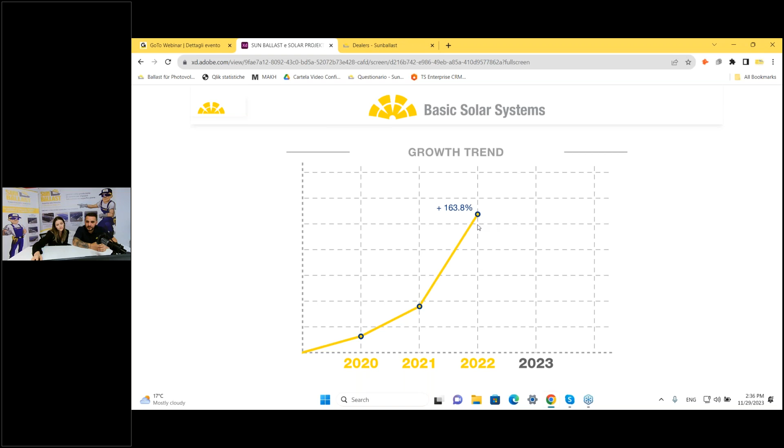Perfect. So in all these years we have this growth plan that I'm going to show you here, to show you that we are a reliable company. Correct, so in these four years we have been reaching great numbers - last year plus more than 56%.

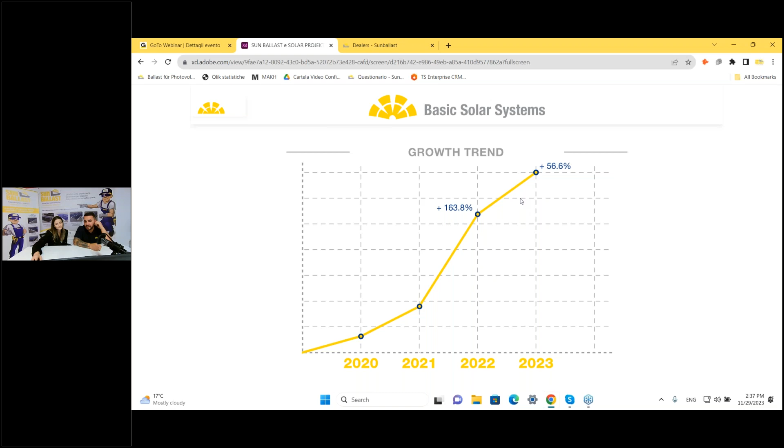Correct. We know that 2022 there was a year with a lot of incentives from the government, so that was the peak of Sun Ballast from 2021 to 2022. There were huge demands from all installers out there. And we see then in 2023 that it's a bit harder, no incentives in the market. We are still doing well, still coming with new solutions, and we see that the trend keeps going up - a lot of people out there are demanding concrete structures on their flat roofs. So now we can say that we are present in all Europe.

With more than 40 distributors all around Europe, we have a new branch in the United States lately, where we have our distribution point and production site as well, and we are selling almost all over the world. It's been a trend because we started the distribution part four years ago, and now we can say more than 40 countries have Sun Ballast material on stock, and one of them is with us today.

Boris, as I explained before, in his company they always have material available. Perfect. So saying this, we can say some of the biggest advantages of the structure of all our systems.

Then we can see each solution one by one and see what kind of problems they face. As you know, ballast comes with different systems. We do not have only one type of ballast. All the ballasts come with different inclinations from 0 to 35 degrees. Our engineers on the team created different systems for all the problems that installers were facing. So starting from single row systems, the connect system, sail, east-west, all these systems we developed on a concrete structure, and it would be easy for you guys to use.

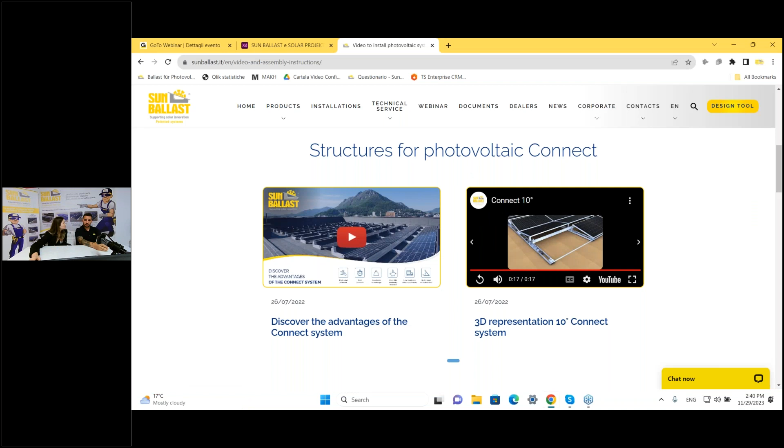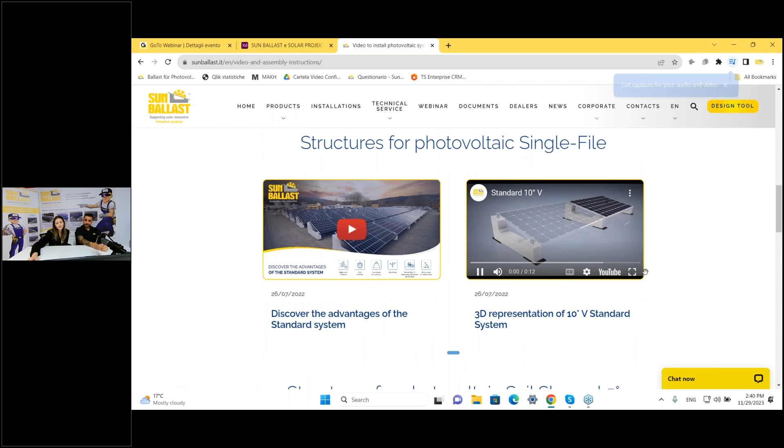The same idea goes for all the systems that we have out there. Another video to show you: same installation, so the sheet, ballast, just position, the module, and clamps that we always provide. Of course, according to different areas and locations, our engineering and technical team can always tell you if it's necessary to use additional accessories, which we also have, and we provide it to you with our technical report. But basically it has just a few components, and it makes the installation way easier.

So now we will see all our solutions. I don't know, Boris, is there anything you'd like to add at this point?

I would just add that mostly in Croatia so far we noticed that using east-west solutions with standard 10 degrees and 60 kilo ballast is something mostly used so far, because a bigger roof area always wants to be much more covered with solar panels, so east-west orientation is mostly used in those cases. Also, the wind is less dangerous for those solutions, so standard 10 degrees 60 kilo is something we mostly use here at the moment, as well as connect system 10 degrees, sail system 5 degrees, and sail system 11 degrees.

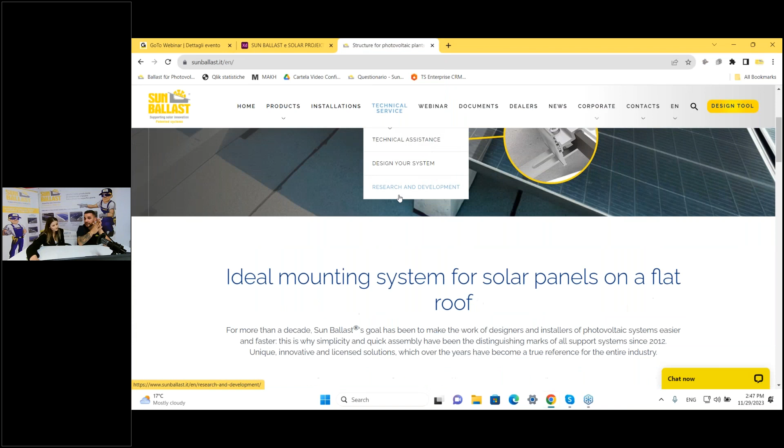There are countries, I can say Malta for example, that don't mind using a very small distance of 30 centimeters from panel to panel. It does not create shade. So we suggest 60 to 80 centimeters, but you could change it according to your engineer, according to the area where you're located.

If you want to check what our technicians suggest for each ballast, you have a technical data sheet. You just go to the technical data sheet and you see, for example, here the distance should be at least 60 centimeters to not create shadow between panels, so they will produce more. Of course, there are two ways of laying it.

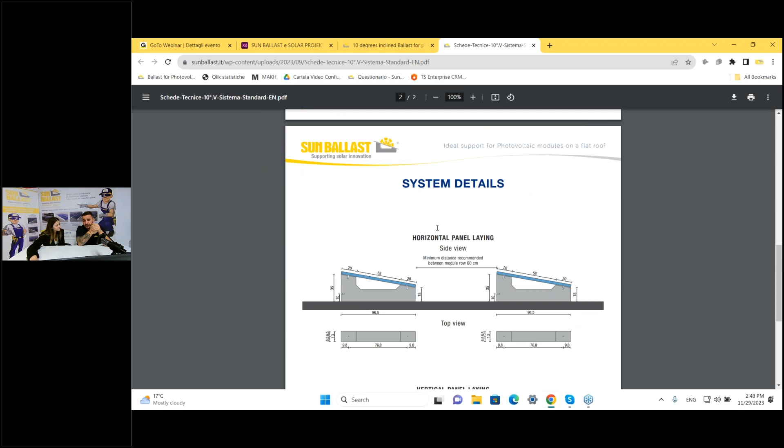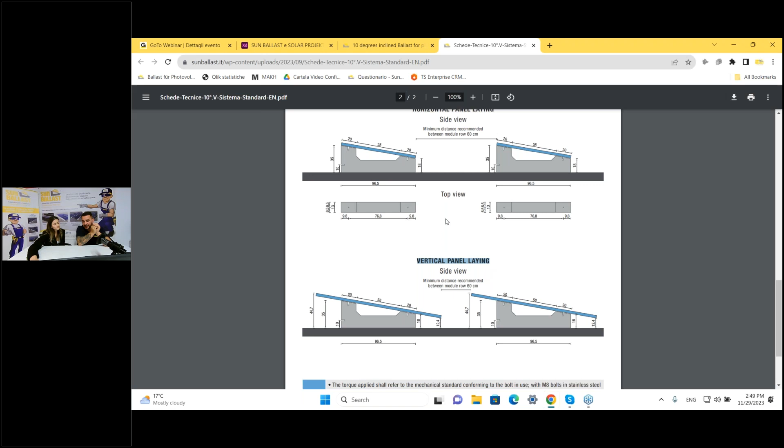For standard panels, you could use it on horizontal position or on vertical position. As you can see here, the standard distance we left is 60 centimeters, could go even more, could go even less, according to the area where you're located. But that's our standard, and that's what we suggest in case you want to do your installation. In here, you can find all the details: the dimension of the ballast, the weight, and the panel that can be used.

Also, our technician or sales agent can always give you advice on how to use it or what to use in different conditions. Exactly, so that's one of the reasons why this system is versatile. Correct, because even the distance between modules, between rows, it's not fixed.

Okay, perfect. So I guess for the standard single row system we covered almost all the advantages. If you want to see the other typologies we have, you could easily go to our webpage and check all the ballasts available for a single row system. You have 0 degree, 3 degree, 5 degree, 10, 15, 20, and 30 degree. So these are all the possible inclinations of this system.

And if you want to see a finished installation, you can go to the installations page and see all the installations done with single row system. Here you can see all the references. And here you choose the standard system, single row system is the same one, and you see all the installations done. I think you have Croatia as a reference as well.

You can select Croatia, so Boris will be happy. No, he won't be happy. So I guess he did all connect. Yeah. Okay, the reference we have with Boris, I think here they are only with the connect system, but I know that he uses more the standard 10V.

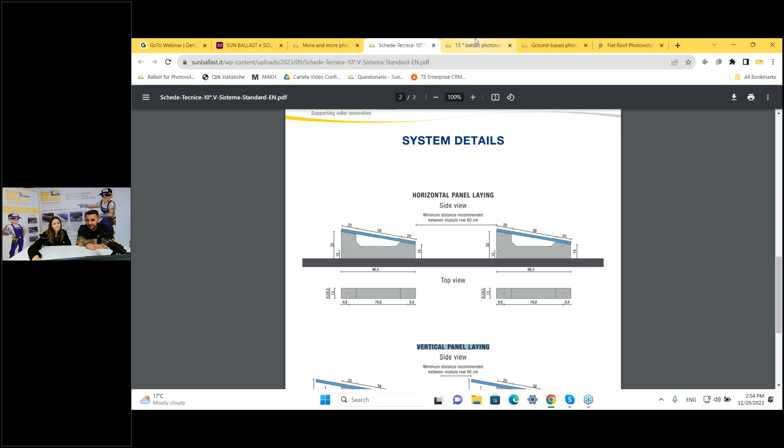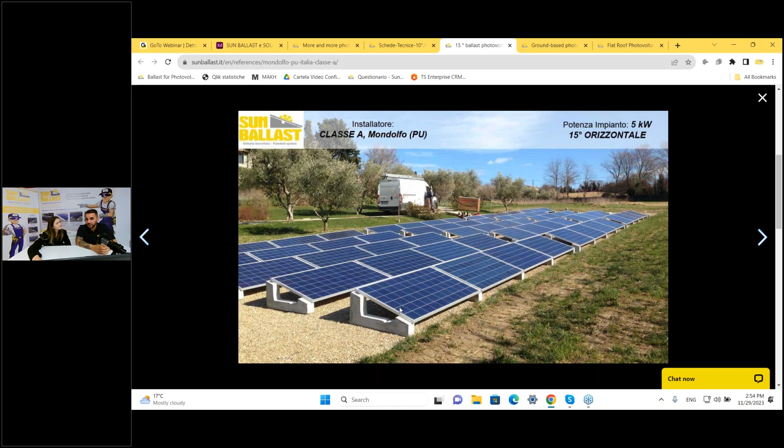So answering the question, a lot of our installers and clients, whenever they do a ground installation, these are the preparations they do before, as Elona is showing in the pictures now. They could be different - some prefer to use gravel. So when the ground is uneven, they can balance it with gravel, and they go over it so it doesn't move. Some of them put gravel and prefer to use some fabric material as well, shown in the other picture.

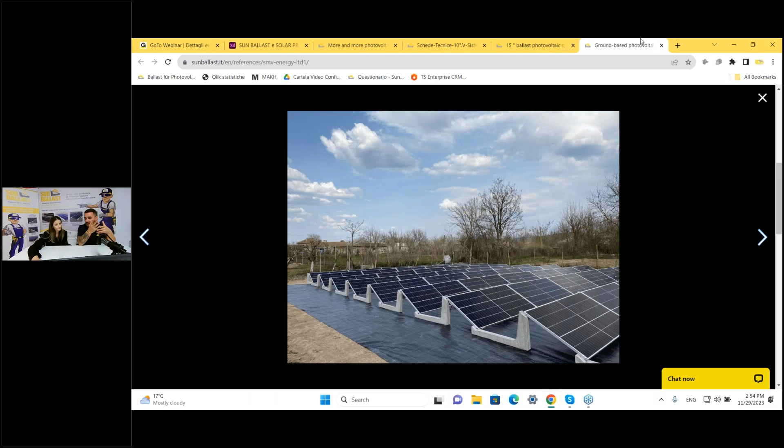So why the fabric material? It has a double function, because in areas where there is grass, it does not allow the grass to grow, so it cannot reach the panel if the grass gets long. Of course, some prefer to go on the ground without using gravel or fabric material at all - they use different machinery to make the ground completely flat, and then they can put some ballast straight away. One of the questions I received more from our clients was about areas where it was not allowed to drill into the ground.

Different type of material in the ground. There are different industrial areas where there are chemicals, so they were not allowed to drill on it. So they had to go with a structure that is above the ground. So we came up with Sun Ballast.

I guess this is the answer to the question from one of our participants. If there's something else I could add, let us know. We always suggest preparing the terrain. It has to be prepared, right? Okay, I guess for now.

You're welcome. So another question that came to me when Boris was explaining is the inclination our ballast can be used around, where in the ground, the roof slope. Boris mentioned he used 0 degrees in some of the roofs. When we say flat roof, that doesn't mean the roof can be at 0 degrees with no slope at all.

Our ballast can be used from 0 to 5 degree slope of the roof without any problem. If there are roofs that go above 5 degrees up to 10 degrees, we could do it, but our technical team needs to do the verification before. They need to check the material of the roof and see what the slope is, then decide what type of ballast can be used.

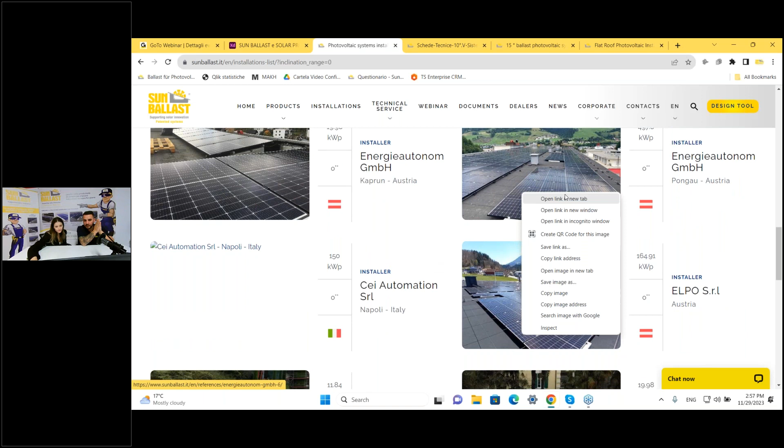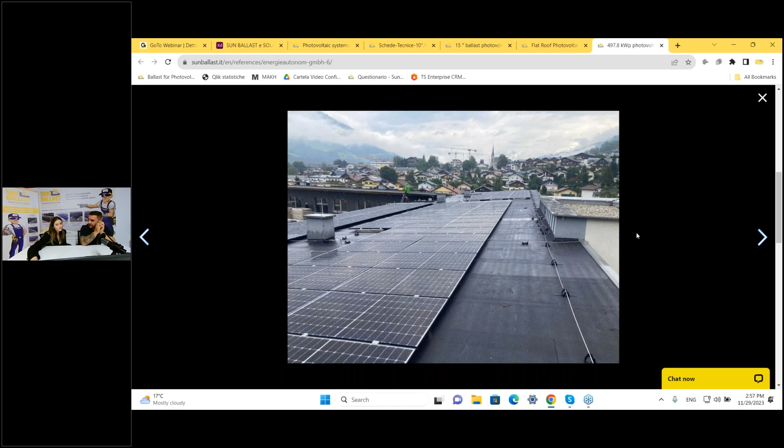In fact, I'm checking if we can find a 0 degree installation. I think there's one, as far as I know, in Sweden, done with the Connect system with a 6 degree slope, and the guy decided to use the foam, I guess with 10 degrees Connect. So probably that is a reference there—you could see it and it looks easier.

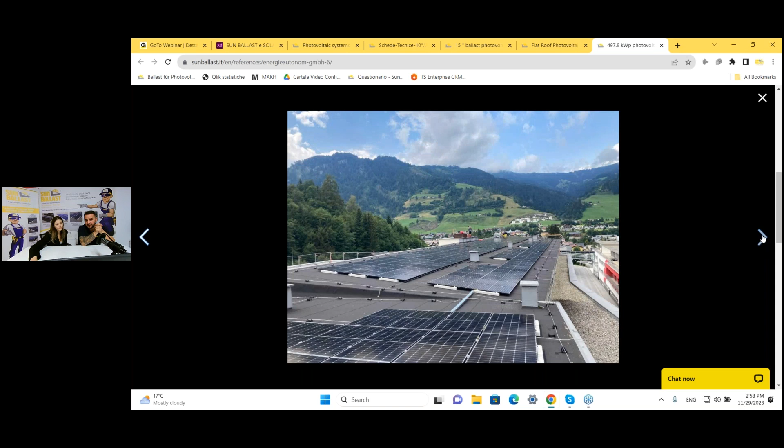Exactly, and here we have an application of 0 degree, on a slope slightly—here there's no need for foam, probably the inclination of less than 5 degrees. Boris did almost the same with a roof that had this type of slope. This one is more requested when there are landscape constraints, so the module stays thin against the roof.

It's a good solution, I can say—it's a preference of the client. Some of them don't want the panels to be seen, or even the project requires it.

Okay, I guess we said everything for the single row system. We can move to the sail system. Correct.

The sail system is the perfect solution when we have limited space on the roof. It comes with two inclinations, 5 degree and 11 degree. 5 degree goes up to 6 rows, and 11 degree goes up to 3 rows. 5 degree can be installed in horizontal and vertical panels, while 11 degree only horizontal, as I mentioned—it's a perfect solution for space optimization.

Because what we have done in this case, you see, this is the system—it's the same inclination, 5 degree, but we have raised the second, third, and each row to not leave space between the panels, between the rows, and in this way we reduce the space used for the plant.

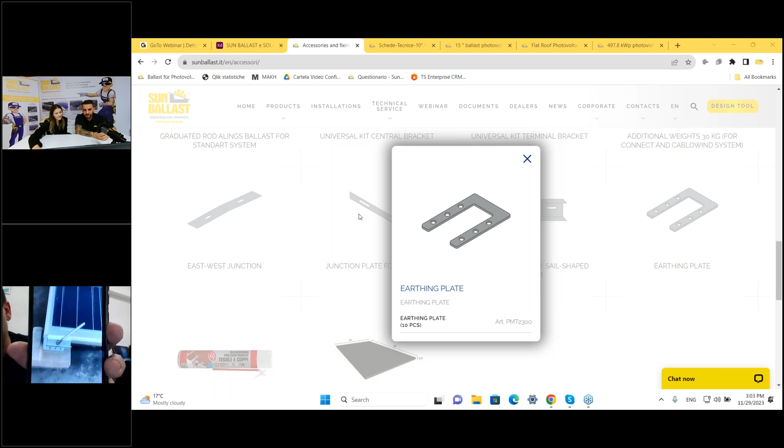Boris, whenever you finish your installation, when you do the grounding, you use the junction, the earthing plate that we have, right? I have it on a mobile phone video, so I can put it here on camera. Just to make a right connection between this epoxy layer that panel frames have, it's put to make the right connection.

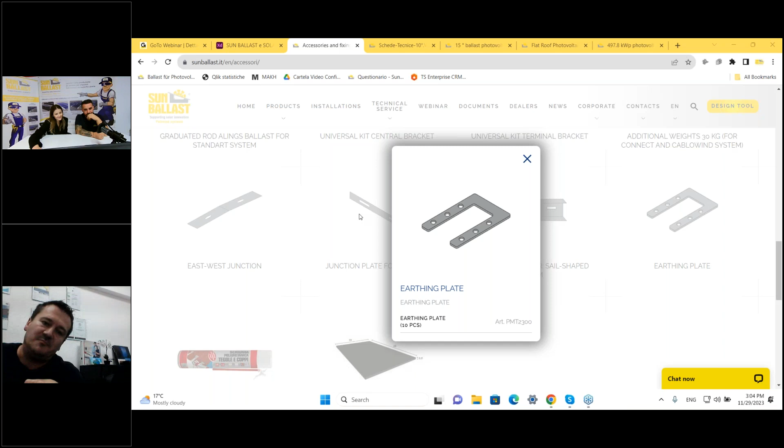Regarding the question Marco asked, that's about where your thunder protection is in relation to your solar system. Sometimes if your solar system is transpassing your thunder protection, you need to connect it directly to the earthing plate. Sometimes you're connected directly to a grounding position in a box. So it depends where your panels are relative to the existing lightning protection on the roof.

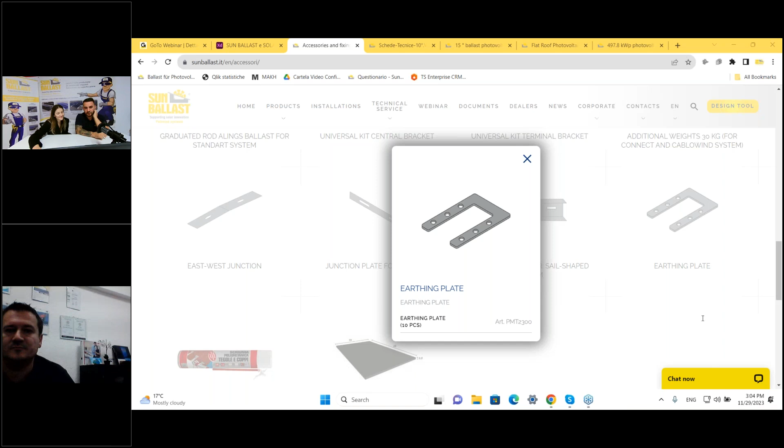If I may add, this is something not yet in the market, but we're starting in the US, and soon it will be in Europe too. We might change our clamps into something that also functions as an earthing plate, so it could serve both functions. We're still deciding if we'll use this in Europe. It would be a nice 2-in-1 solution, using it as a clamp and an earthing plate as well, but it's a completely different structure. I don't have a picture here, but later when it comes to Europe, we'll definitely share it.

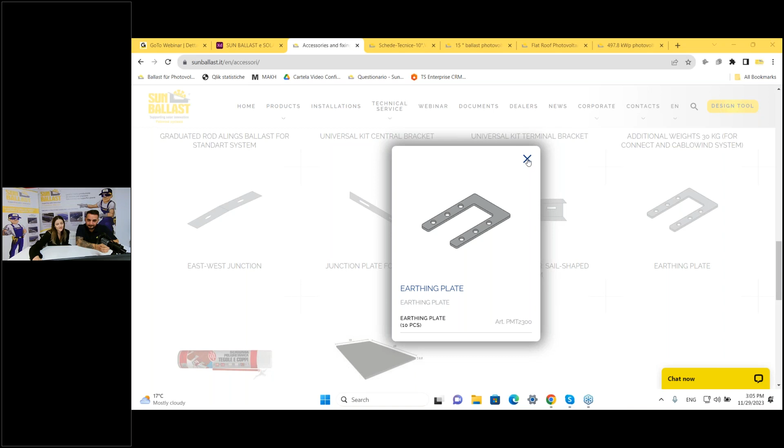I guess we answered your question, Marco. Let us know if everything's clear or if you have any further questions.

So we were showing the Sail system, and as mentioned, it's the perfect solution when you have less space on the roof and want to put maximum power on it. There are a lot of clients who have garages on their house, for example, and they say, I have this space on the roof and I want to put a high power plant using another system. So the Sail system is the perfect solution in that case.

So for those worried about the weight, because the ballasts are heavy and each ballast has a different weight, right? The higher it is, the heavier it is, right?

Don't worry about it, because we do the calculation for the load on the roof that you have. Even if it's a garage, even if it's a different type of roof, we provide you the load on the roof so you could see if you can put it or not.

So the Sail system, if you have no questions, is a flexible system. For example, there are even cases where there are obstacles on the roof and you just remove one panel and it's okay. It has flexibility as well, the same as a single row system. You could add or remove panels without problems. It's very quick to install, has high wind resistance as well, and is the perfect solution in cases of limited space on the roof.

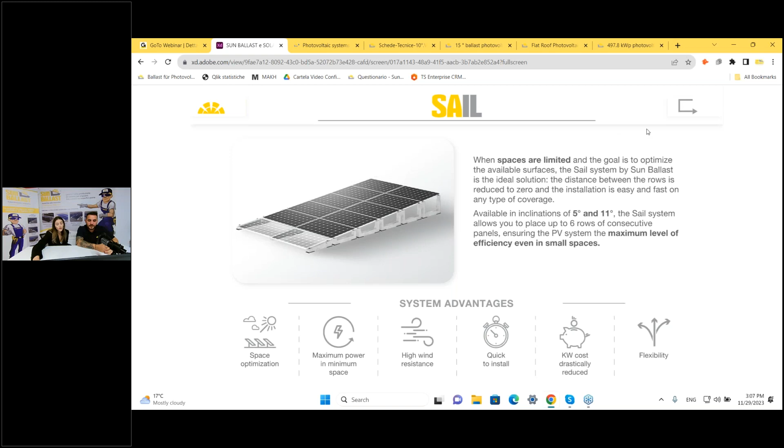we can go on with the Connect system. One of the systems that Boris is using a lot as well, whenever it's required to have less load on the roof, Connect system is the one our agents suggest mainly. As you can see from the picture here, it's not with single ballast.

This type of system comes with 3 types of ballast. So you always have a terminal one, a central ballast, and a frontal one. You could start doing your installation from the frontal one to the terminal one, or you could start from the end. It doesn't matter, it's the same thing. As long as you add central ballast, you could keep increasing the power by adding more panels.

So these are the ballasts that I was showing you: the frontal one, the central, and the terminal one.

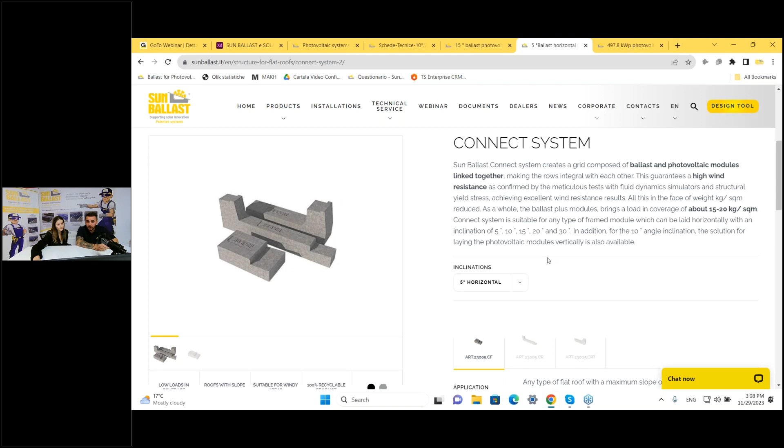And you said it's the perfect solution when we want less load on the roof, especially when there are heavy wind loads in the area and we want a system resistant to wind loads. It's all connected - from the name itself, the system is all connected and this cannot move. The more panels you add, the more it will withstand heavy winds. Even though the ballasts weigh less than the single row ballast, together they make the system more resistant.

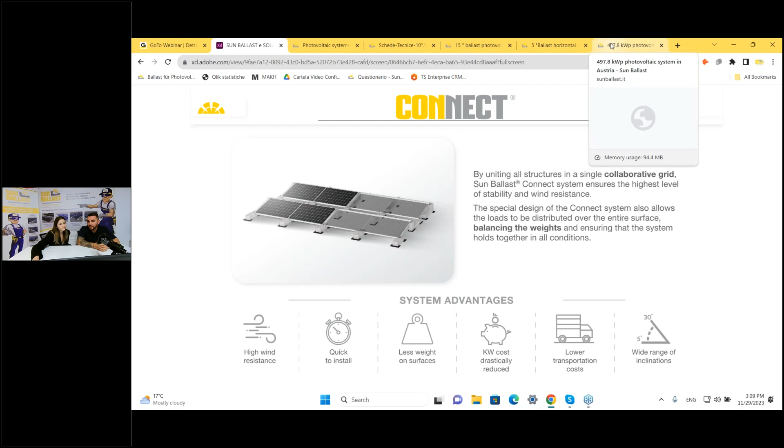So in some cases it's required to add additional accessories even for this type of system. For Connect, we have an additional weight which Boris uses as well - that additional weight is the U-shaped 30 kilogram piece.

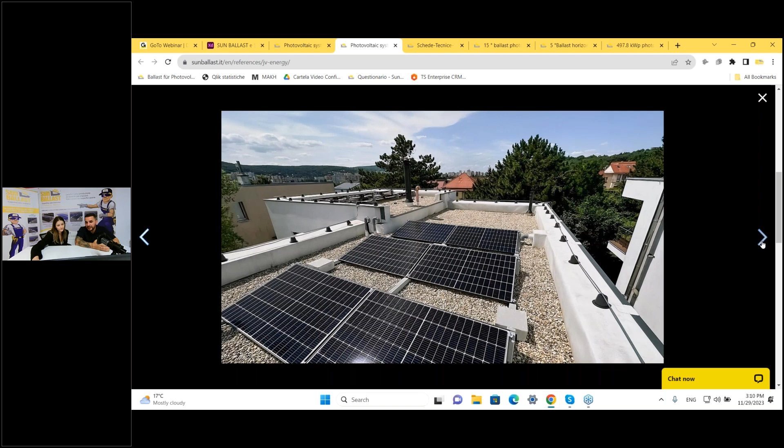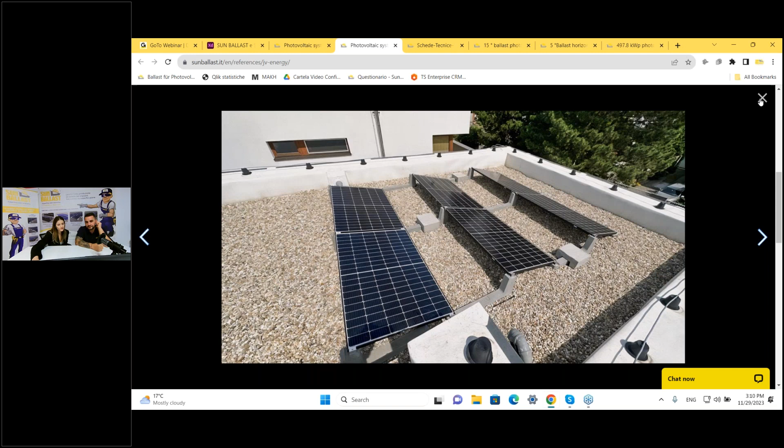Elena can show us a reference now where you can see how to place the additional weight. You can put it always on the central ballast in case you want to reinforce your system. Based on the technical department's calculations, they decide if it's necessary or not. We can never tell you that you need to use it without doing the calculation to check if it's required. We might tell you to use it; if not, you could use only the ballast and that's all.

I would like to add that no matter what system our clients are using, we always refer them to get a verification from a Croatian static engineer, because especially in Dalmatia, where we have really quite dangerous windy zones, according to the verification of the official static bureau, we add or duplicate some positions of the ballast inside the system.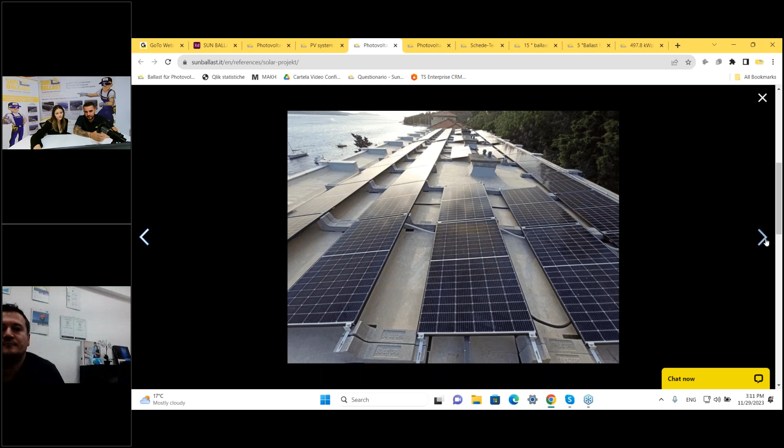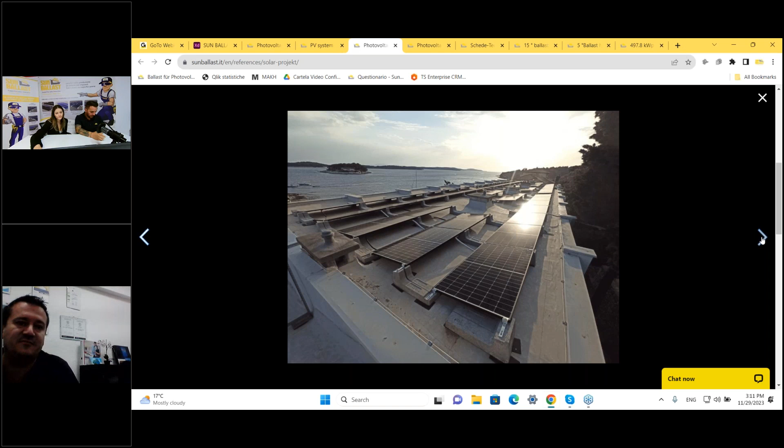So it's 30 - I think that middle one is 33 kilos, so we have 66 instead of 33. Correct, I can confirm it.

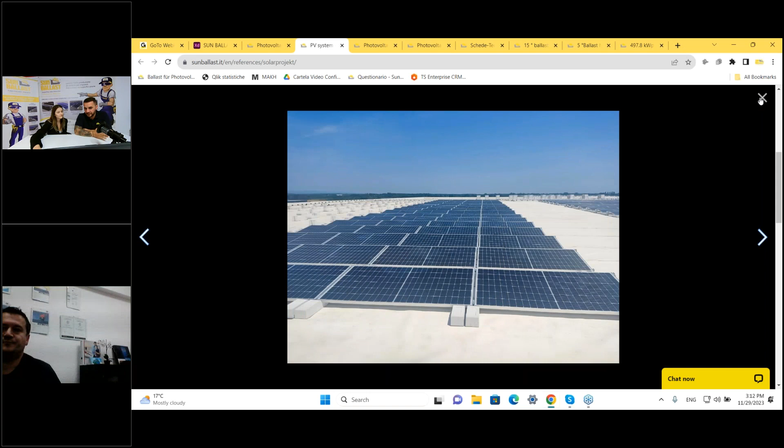As you can see in all the references and installations that have been done, one thing that comes to your eyes is that the system looks very clean and neat. You don't have a lot of accessories laying around. I'm not saying other mounting structures are bad, but with Sun Ballast there are fewer components, so whenever you see it, it looks very clean, no cables around. This is something some customers wanted - really straight lines, aesthetically pleasing.

What about the load on the roof? For this one, we do the calculation with Connect. It usually goes 15, 20, 25 kilograms per square meter maximum, according to the area where it's installed, and could go even further. The standard is Connect goes 20-25 kilograms per square meter, which 99% of roofs can hold. If you need more weight, it can be added. Boris mentioned that after receiving our technical report, they always reconfirm it with the statics in Croatia to verify if it's okay for the area or not.

Perfect, okay, then we saw even some installations. If you want, we can see a video of installation here, so we give the idea of installation as well.

This one is the Connect system. As you see, it couldn't be any easier. The idea is the same - the Connect has only 3 types of ballast: frontal here, central, and terminal here. I can confirm it because I see a lot of attendees here, some of them our clients, some our distributors, and they've been using the system and can confirm with me that this is very simple to use.

For sure, the pieces are lighter, so we could move on to transport cost. Less weight means less transport cost, so it's an economic solution, I'd say.

But for that, you guys in Croatia don't need to worry about it because Boris keeps, I think, thousands of ballasts always available. I guess he confirms in silence. I guess we can move on with the other system because we don't want to keep you guys too long - why Boris is laughing now, because I don't know how much stock he has in there.

No, we like to keep bigger stocks, especially with the standard, mostly because we are using that most. We also have Connect Sail at 5 degrees, as well as additional ballast with 30 kilos, so it can be done whatever. But it's very fast because we have a nice warehouse here and a good carrier, so we can distribute it all around.

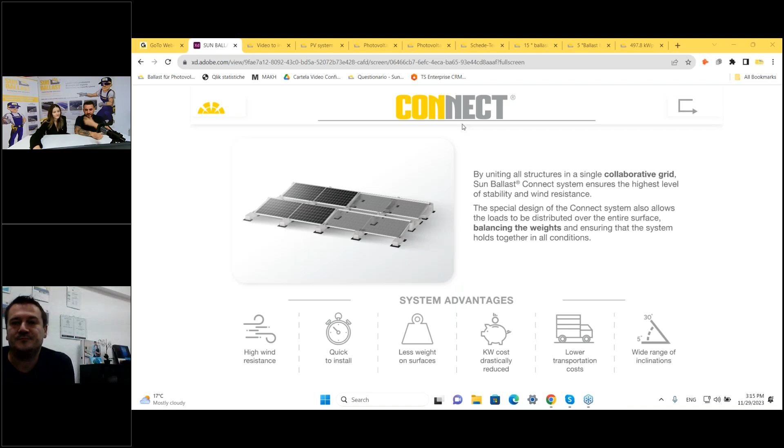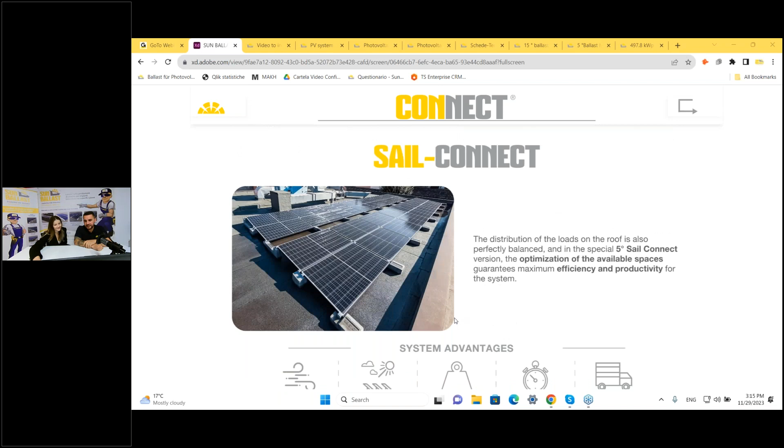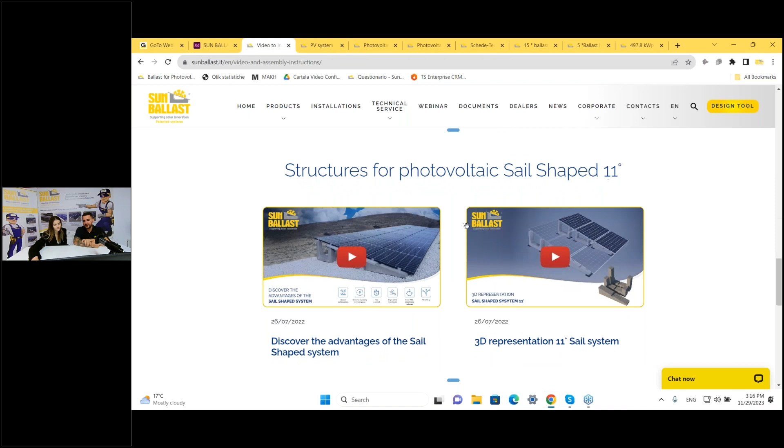Perfect, okay, then we explained the sail system, we explained the Connect system, and after these two solutions we came up with the Sail Connect - a mix between the Connect system and the sail system. This type of system comes available only with one inclination, 5 degrees. The only difference, as you see in the picture, is an additional ballast added on the Connect system, which allows you to connect two panels next to each other, so you could add more power using the 5 degree sail connect system. It gets the principal advantages of both the sail system and the Connect system - more wind resistant and space optimized.

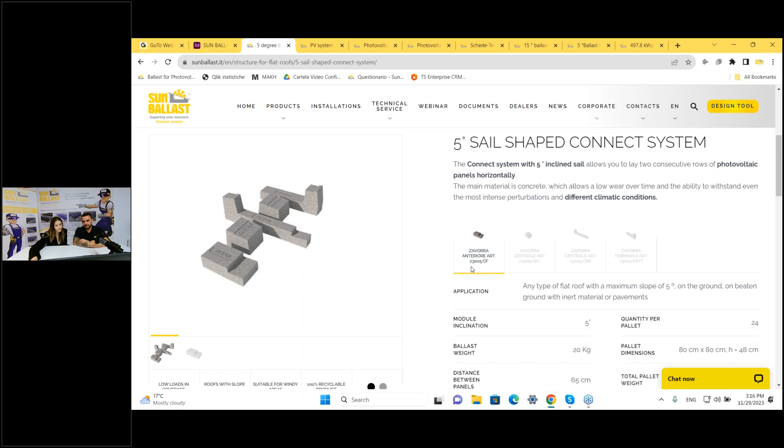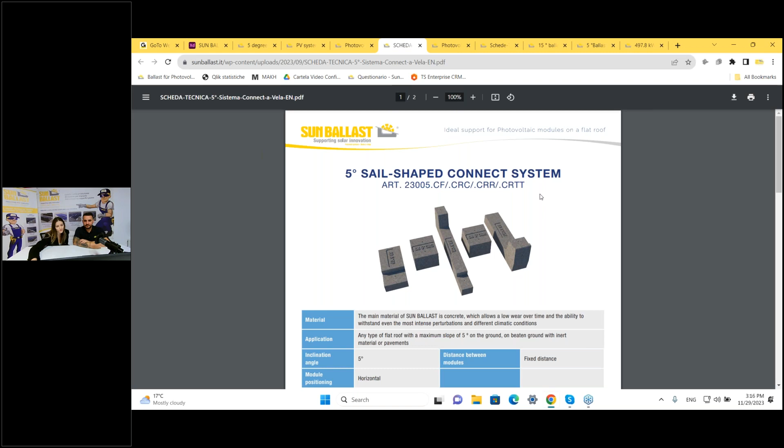Here are the pieces of the Sail Connect system, and here's the technical data sheet of the system - all the dimensions and weights are mentioned there. And this is the way it's installed: frontal, the central middle one, another central middle, and here's the terminal one. So it's the perfect solution if you want both space optimization and the advantages of the Connect system, which is wind resistance.

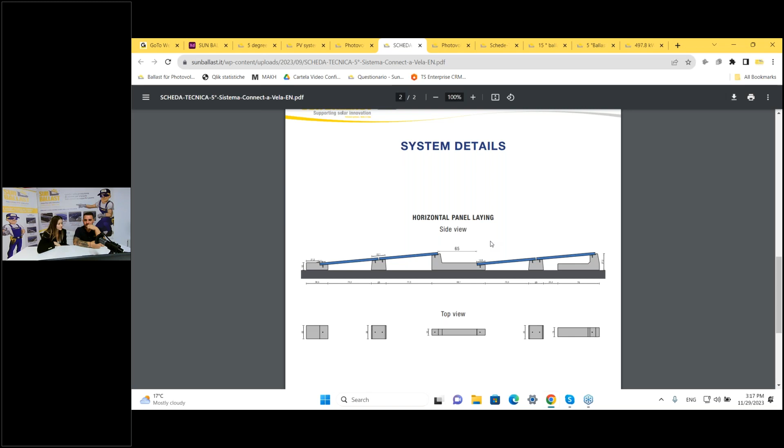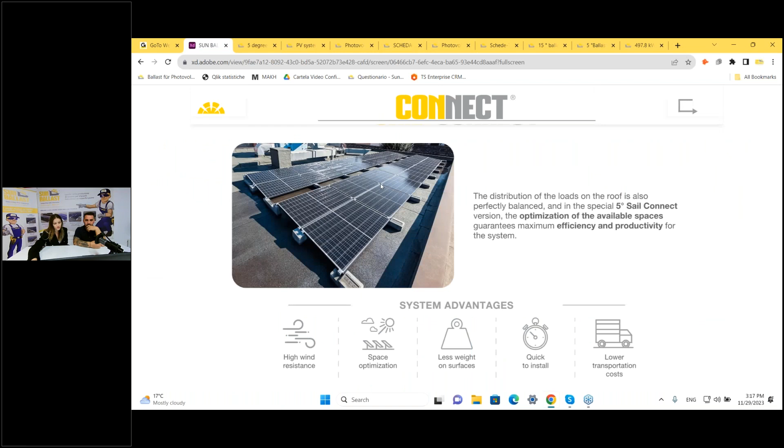It's a perfect solution, I guess. Okay, if everything is clear, I guess we can proceed with another system.

And it's an east-west system. The east-west system, as even Boris mentioned, are our single row ballast. Easy, you could just turn the ballast back to back, and you could create an east-west configuration. It's very easy, so you can use all the ballast of the single row system, like 3 degree, 5, 10, 15, 20. You just put them back to back, and in this way you have an east-west system.

Also the ballast of the sail system, those from 5 and those from 11, you could use the highest one Boris mentioned, and do an east-west configuration easily. Exactly, and if you have a client that has done a sail east-west system, you use all the sail, and it came up really nice. It looked like a roof when you see it from above, because it was really long, but a really nice solution.

Yeah, it's a perfect solution in case we want space optimization, and in case we have a non-optimal exposure of the building. So you can't put the panels oriented south as usual, and you have to use the east-west system. This is the perfect solution, according to the area where the building is located. If you have another big building in front of you, or trees, if it's like a residential house, that will create shades on your system, east-west configuration is something we suggest and can generate more power.

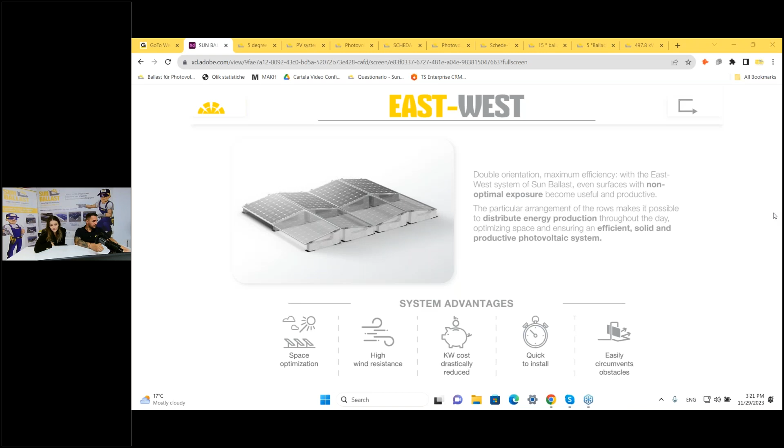And I guess Boris can say even more about the east-west system because he loves this system, I guess. Well, yeah, we already explained that in most cases, a lot of developers and investors want to fill up the whole roof, and you can achieve that by using an east-west raster. So the best solution is using ballast.

I would just add that, for example, in Croatia we have a difference between the northern part and the southern part in Dalmatia, where wind zones are much higher. So in the northern part, with let's say 60 kilo east-west, it's totally enough to be wind protected. In Dalmatia, on the very edges, according to micro locations and according to what static engineers verify, mostly we need to duplicate some positions or add an additional 30 kilo ballast.

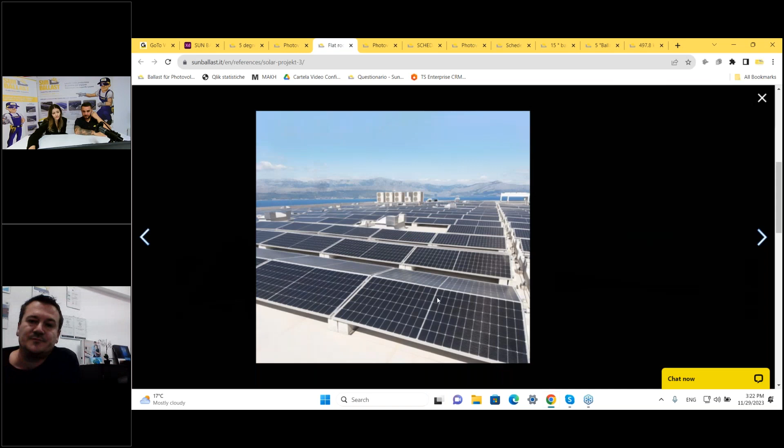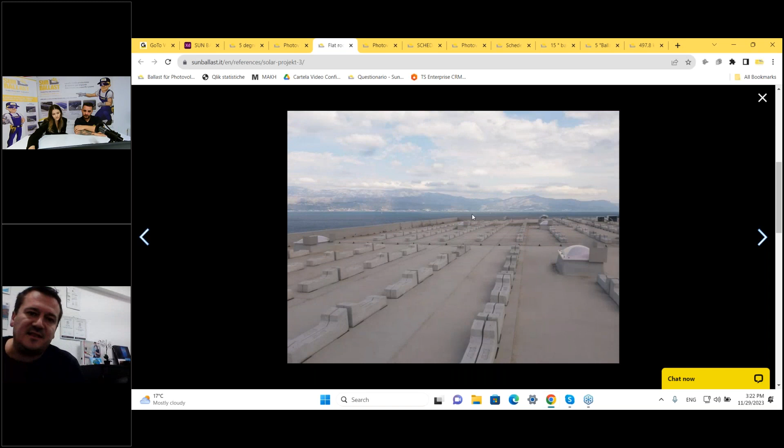Here we have an example of your installation, Boris. This installation was also in a windy area, the island of Brač. It's a duplicated ballast, even duplicated on most of the positions, as can be seen, almost every position, because the sea is close and all the micro conditions were at a level that the winds were really in red totally. So we duplicated, but we achieved the goal. The system is installed, it's like 250 kilowatt peak, so it's a big installation. In that area, it's sometimes required to add additional ballast.

Here is another one with additional weights. So it's a good system even to avoid obstacles on the roof, because you can continue around them.

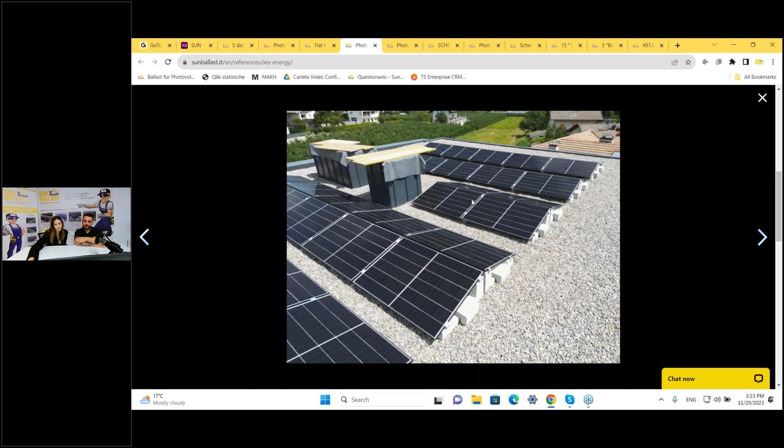Another example, we have a lot of examples on our website, you can see the systems. I guess Boris on his website has a lot of references with different types of inclinations, different types of systems, I know Boris tried almost all of the ballasts that there are. So this is the website, Elona is opening it, and there you could see references from Sun Ballast, and you could see a good part of the installations Boris installed with Connect, Vela, Standard, all of them.

So you can consult them anytime you'd like to see examples of the installations. We had here even smaller systems on residential homes up to bigger systems on shopping malls or industrial centers.

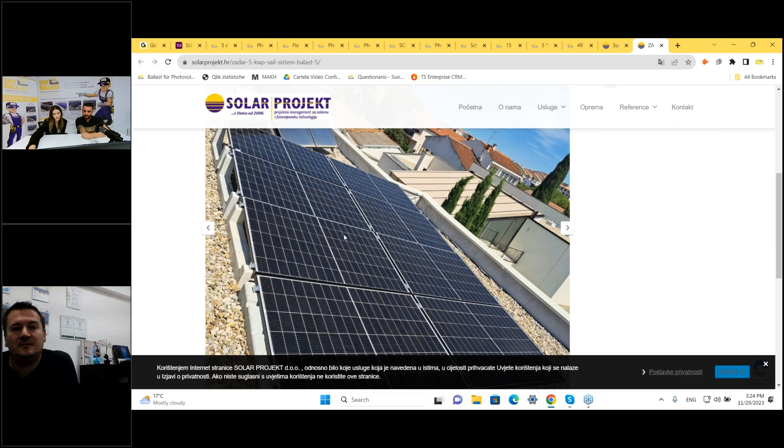This is a small one with sail system, nice one on a gravel roof. We will mention later, as soon as we finish with the solution, the type of surfaces that you can install Sun Ballast on. Okay, then I guess we are good to go with another system.

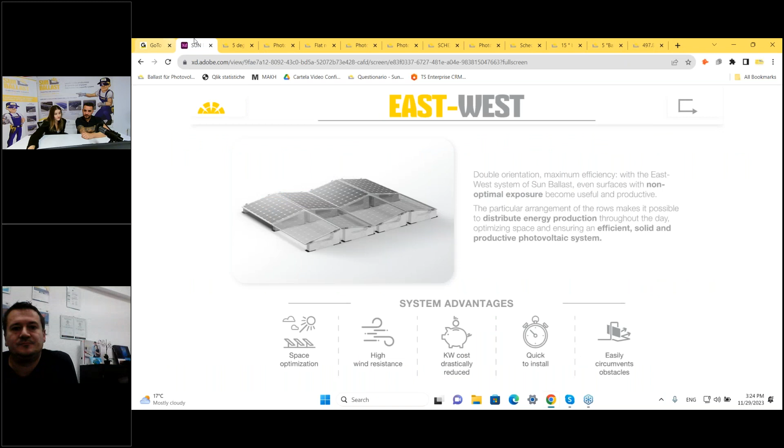The novelty of this year, we have two solutions in fact: NoFlex and Industrial XL. So let's proceed firstly with NoFlex and then proceed.

NoFlex is one of the latest systems we launched this year, knowing that in the market there are coming bigger and bigger panels. With time, all the installations that have been done, not only with Sun Ballast but different types of mounting structures, installing in a horizontal pose for a large panel sometimes caused some incidents, sometimes caused flexibility of the panel. That happened even with Sun Ballast. So installations done in 2019, 2020, some clients came back to us asking what the solution is for a large panel, since they had a large panel installed by us, and how we can avoid the flexibility of the panel.

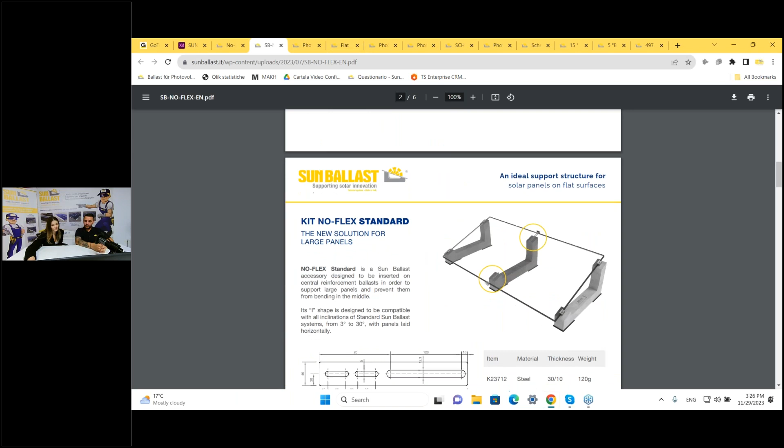So we came up with this solution, which allows you to add another central ballast on the center of the panel. We all know that whenever we request the details from the project, we get the technical data of the panel, so we want to see the dimensions of it.

Whenever we see that it's big, sometimes we require the installation manual. We require this for some reasons: some panels have the fixing points differently, some panels can be fixed only on the sides. So with the NoFlex system, it allows you to clamp your system not only from 4 clamping points, but now with 6 - 2 in the center and 4 on the sides, which we usually do with a standard ballast or standard panel. So with NoFlex, it's easier.

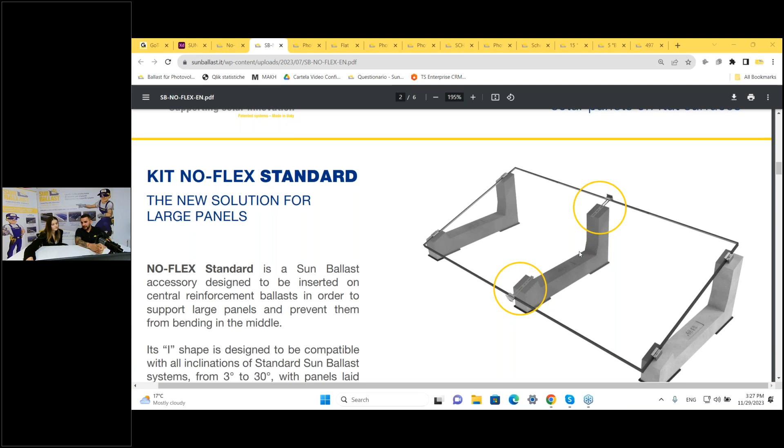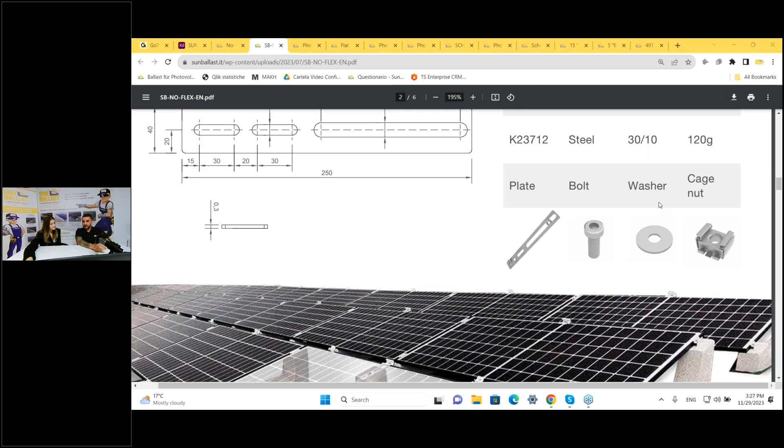We created this - Elona can show the accessories. These are the accessories that come: a junction plate with bolts, washer, and cage nut. They come as a kit all together whenever you order it, and they are in 2 different shapes - the I shape used for the standard ballast, and the L shape used for the Connect system.

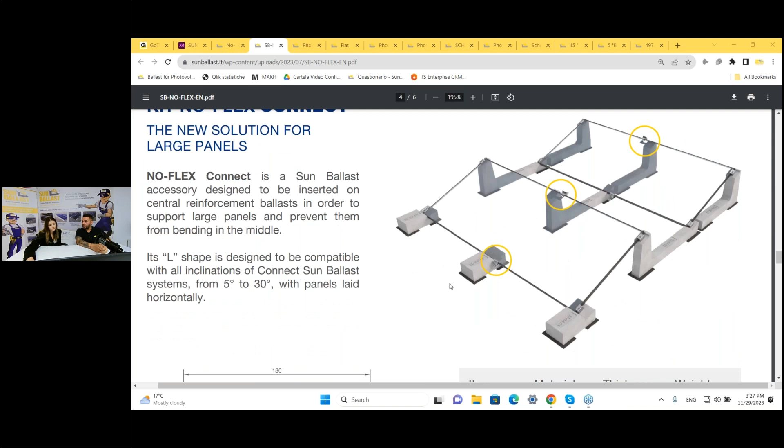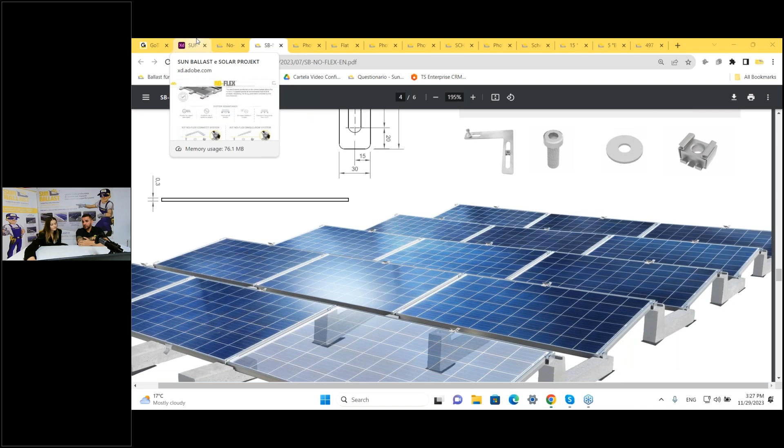Yeah, very easy to use. Of course, you have all the data and technical data sheet with the dimensions of the plate and how you can use it, but we suggest it to avoid any incident that might happen to your panel, to make the system more resistant. Of course it will increase the weight on the roof, but the system will be more secure and will avoid the use of any additional weight that we must add.

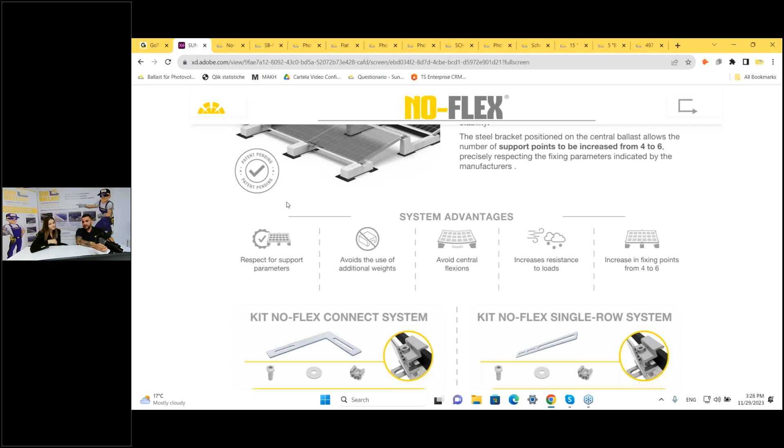In case we had an additional 30 kilos, now we don't use it anymore - we add only a central ballast and it's used. Also, using No-Flex, we respect the support parameters of all the panels, and we avoid the central bending of the panel because with time that passes, even because of the wind and snow as well.

Snow is one of the factors that can damage the panel more in some areas. When it snows, the large panels can tend to bend more easily, and that will cause a lot of damage - even economically, the client will come and say, I have to buy new ones, I have to replace them. So we always suggest using No-Flex in that case.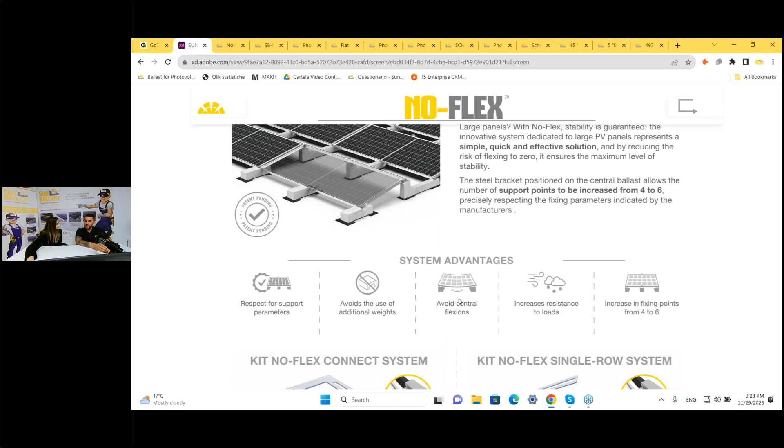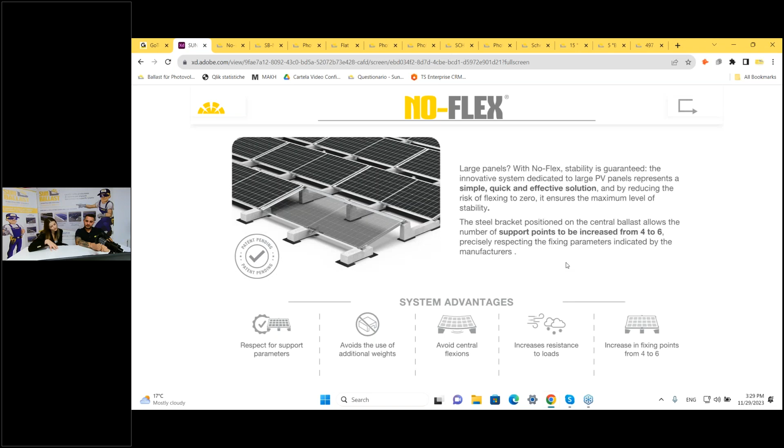So like this, you could always sleep calm at night, you don't need to worry about your system. Exactly. NoFlex is the perfect solution when we have large dimension panels, and we want to respect the parameters given by the module producers, avoiding the central bending of the panel by increasing the fixing points from 4 to 6.

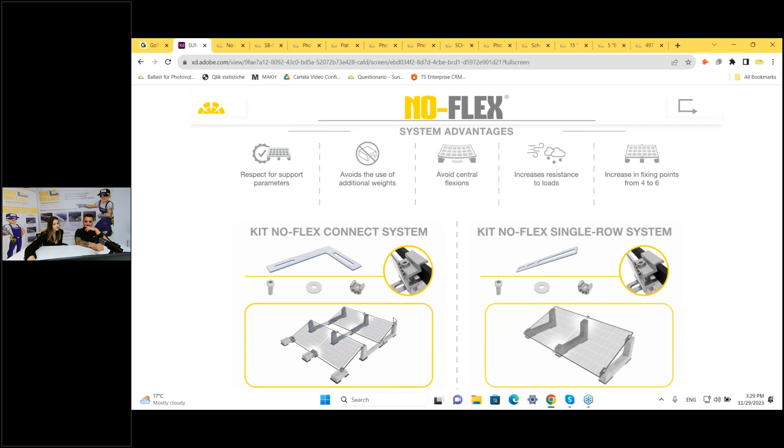Okay, so we gave the first solution for large panels this year, with two plates - one for the Connect system and one for the single row system. You can see here they are different because even the systems are not the same, and they are all approved even by the biggest manufacturers out there. You can see the names here - we don't need to mention them because we know you guys have all been using at least one of those panels, so they are all approved.

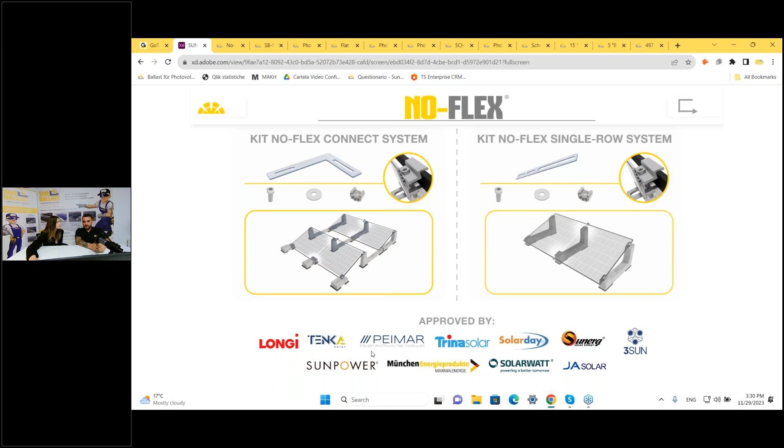Okay, I guess we are good to go with NoFlex. Let's go now with the latest novelty for large dimension panels. It's the Industrial XL system.

What is this, Sarah? Industrial XL, from the name, it could mean a lot of things, right? So we came up with an idea of creating a new solution for you guys on the Connect system. We wanted for the large panels to do a system, because when we say we're going to use NoFlex, some people say I'm backing out because there's a lot of load on the roof, or there's an additional cost. So studying it, our technical department, our research and development department, came up with this type of system.

What is XL? It comes from the name because there is a central ballast which is longer than the usual Connect central ballast, and it allows you to use large panels on vertical posts without adding additional ballast. We have it available only on 5 degrees, and studies are being done for it. We wanted to generate another inclination, but for the moment, 5 degrees is what we are providing.

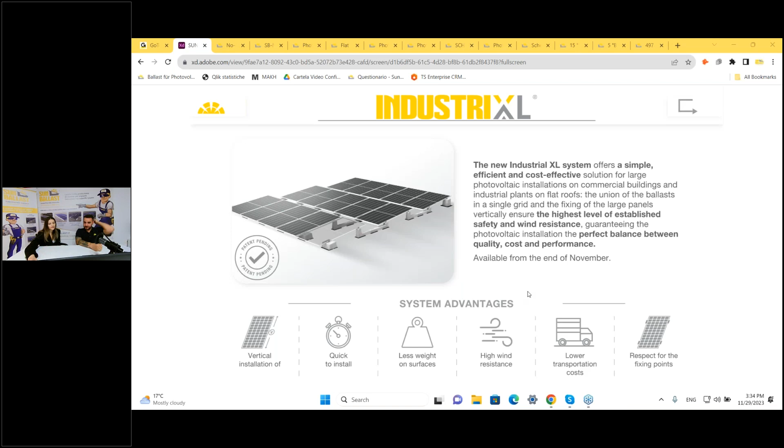Okay, then I guess we've covered a little bit of all our systems, all our solutions. And now we can get back and talk about a very important part of our company - yes, the technical department.

Okay, perfect. So how does it work with the technical department at Sun Ballast? As you know, Elona, Sun Ballast is known for every project we send out for the details we provide, not only from the customer support, but also from the technical part. Each of your projects sent to us, or sent to our distributors or to Boris, will receive our quote along with the technical department's input.

Our team here has, I don't know the exact number now, it increased a lot lately. We have more than 15 technicians who work daily on the project.

So what do we provide whenever we get a quote request from our customers? There are several data points we usually ask for in order to provide the report. Those data include the address of the installation. This is very important because with that we can do the load calculation and wind calculation for the area.

Apart from that, we request the typology of the panel being used. We want to know the dimensions, the height of the building, height of the parapet, typology of the roof, what material it is, and more. A DWG or CAD drawing would be very helpful for us to give you an exact number of ballasts, so you can generate your quote.